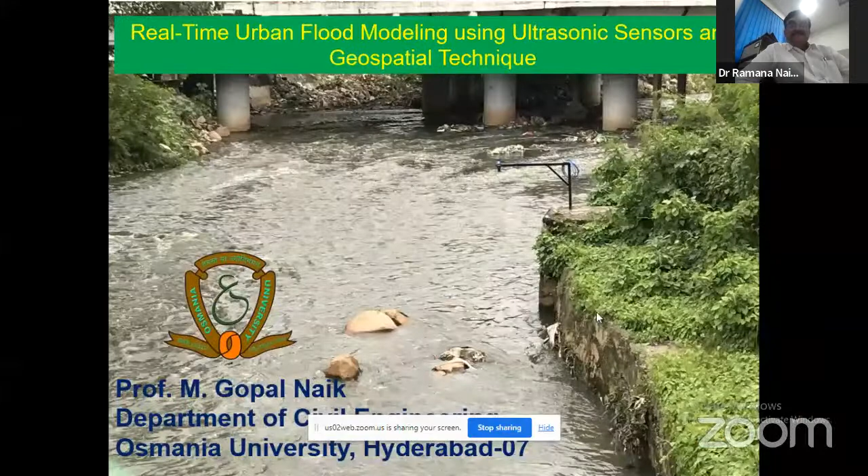Now, is it okay, sir? Yes. Oh no, again it has gone up, sir. You have to share. Okay. Yeah, now it has come. Yes, now it is visible. Now you can proceed. Yeah, it is visible, sir.

Thank you very much for giving the opportunity to deliver a talk on real-time urban flood modeling using geospatial techniques and ultrasonic sensors. It is a pleasure to be part of the Institute of Engineers as an FIE, and it is my pleasure as a Professor of Civil Engineering at Osmania University. I am working on this topic, and I can give a few minutes talk on this, which my PhD students and research scholars are also working on.

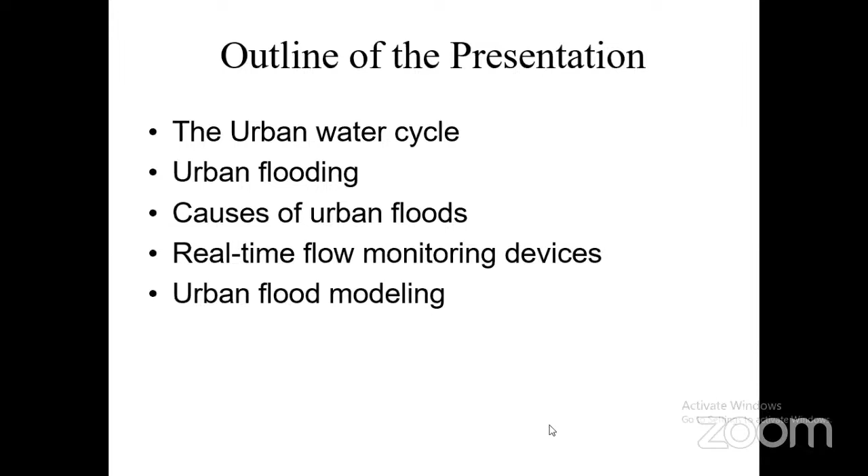Today I am delivering this talk covering a brief outline of the presentation: urban water cycle, urban flooding, causes of urban floods, and real-time flow monitoring devices and urban flooding modeling.

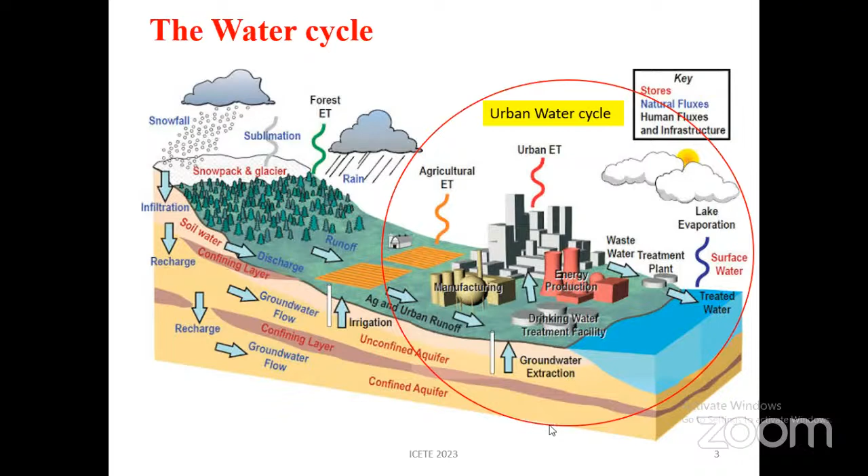Everybody knows the concept of urban flooding, watershed management, urban drainage systems, and hydrologic cycles - how the circulation of water works, what precipitation and runoff are, rainfall-runoff activities, infiltration and percolation, and surface flow. We can see the urban water cycle as how it evaporates, transpires, and then precipitates again.

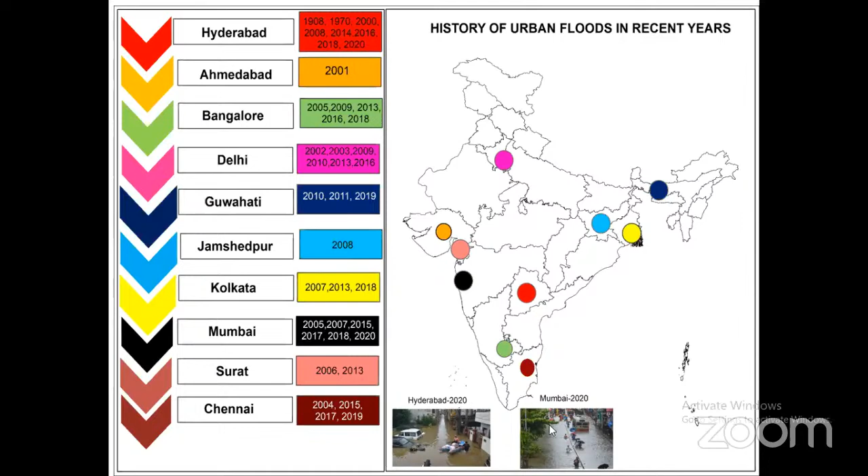Sometimes we are seeing frequent rainfall events - extreme rainfall events which occur at more than 10 centimeters per 24 hours or per day.

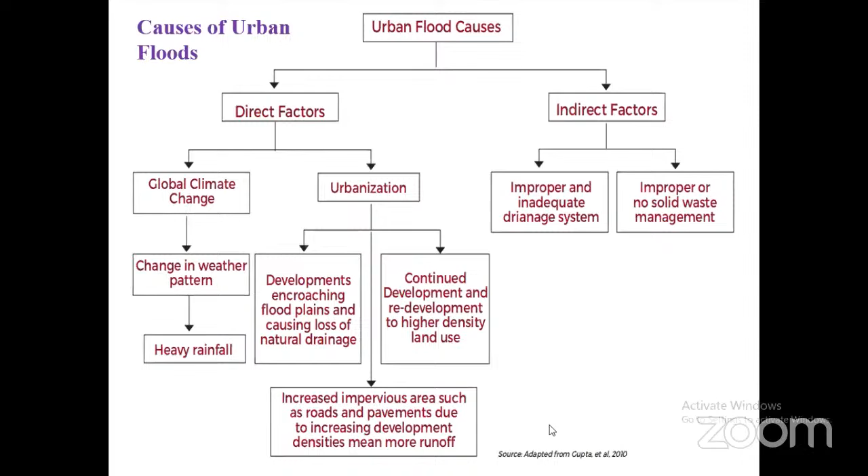The direct factors - climate change - we have seen over the last couple of decades that climate change and global warming are affecting and changing weather patterns, increasing temperature by 1 to 2 degrees on average, which affects the whole system and also contributes to the greenhouse effect.

Global warming and climate change represent a global gradual increase of earth surface temperature and long-term change of global weather patterns. These directly or indirectly affect atmospheric and climatic parameters.

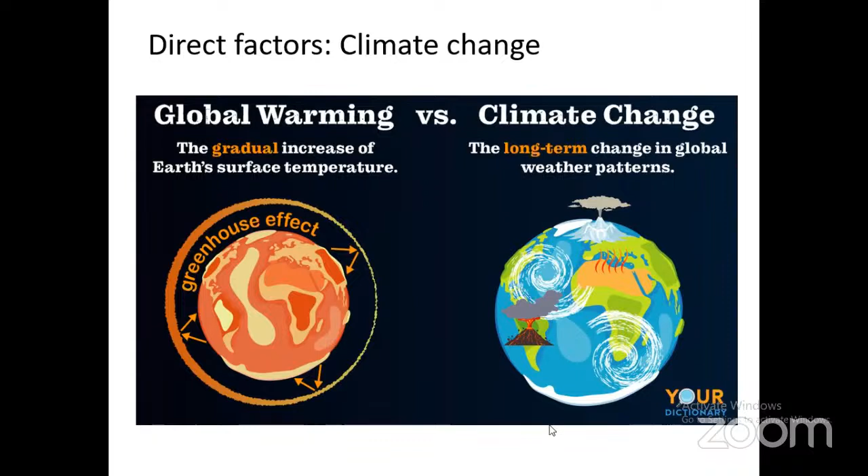These atmospheric and climatic parameters are affected, suddenly changing their behavioral characteristics and causing frequent rainfall events. The change in weather patterns leads to heavy rainfall and sudden formation of cyclones or hurricanes.

This leads to the formation of hurricanes, increases in temperature, and forest fire burns. Pollution from transport - the increase of heavy transport on roads - decreases carrying capacities day by day.

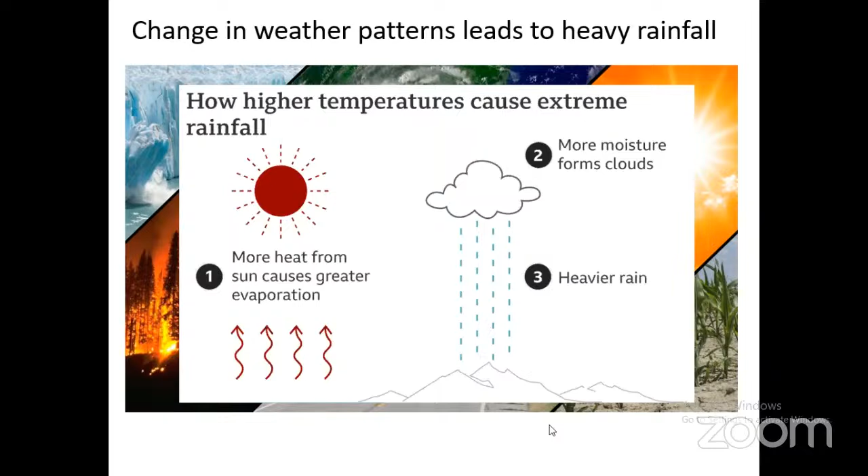These are the major causes for increasing rainfall patterns, with heavy rainfall in different areas. Higher temperature causes extreme rainfall - more heat from the sun causes greater evaporation, heavier rains, and more moisture in clouds. These lead to sudden rainfall in shorter durations with high intensity, occurring frequently.

In the last few decades, after the 90s compared to before, there has been drastic change in urban cities - most first-capacity and second-level cities are increasing drastically. Urbanization growth and population growth are reducing the carrying and holding capacity for rainfall events and rainfall quantity, which directly or indirectly leads to urban floods.

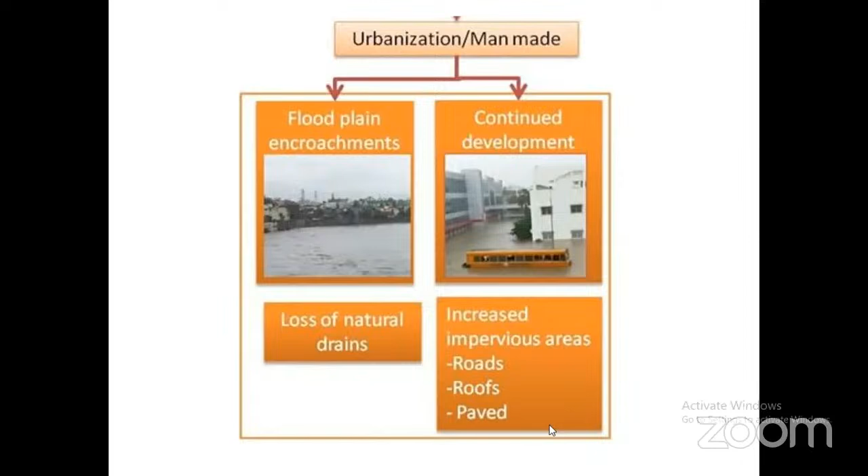Urbanization or man-made urbanization increases floodplain encroachment, leading to continued development in flood-prone zones. It causes the loss of natural drains and increases impervious areas through roads, roofs, and paved surfaces.

In the last few decades, developing regions in Africa, Asia excluding Japan, Latin America, the Caribbean, Melanesia, and Micronesia are the few countries drastically changing in terms of urbanization.

There is a drastic decrease of rural population as all the rural population migrates to urban areas, increasing urban population. These migrations create shelters near river banks and tank encroachments, in open areas wherever the infiltration capacity drastically reduces the rain infiltration and percolation capacity of the surface.

The major holding capacity of water is in the subsurface. When the subsurface is covered with impervious material, there is a drastic decrease in water holding capacity in the surface and subsurface, and most of the carrying capacity is converted into runoff.

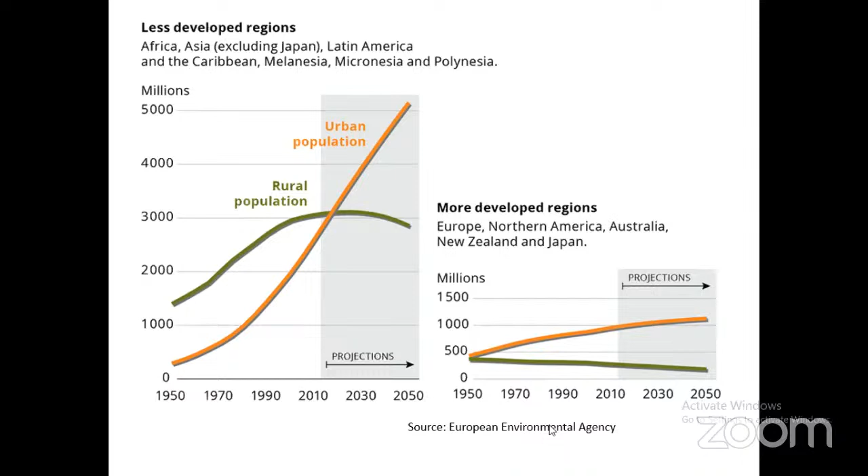Urban heat islands increase the rainfall rate around cities by 48 to 116% as per NASA's report. The wind interacts with urban-induced convection to produce downwind rainfalls, leading to sudden rainfall events and heavier sudden rainfalls with high intensity and shorter duration.

Causes of heat islands include construction materials like concrete and asphalt, lack of vegetation, lack of evapotranspiration activities affecting cooling, waste energy from air conditioners and cooling systems, air and water pollution, and tall buildings blocking surface heat from radiating into the relatively cool night skies.

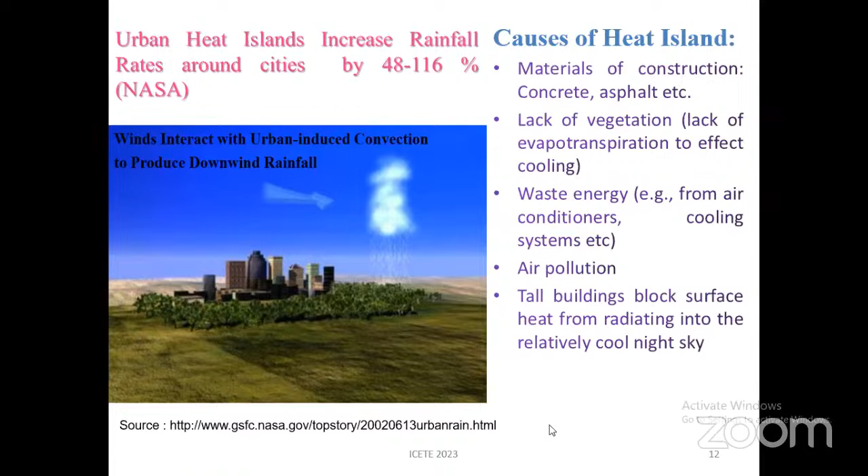These factors influence the surface and create more impact on the atmosphere and climate. This sudden, shorter duration, high intensity rainfall occurs over shorter distances and zones, creating flash floods.

The indirect factor is the poor drainage system, experienced by every city. There is no proper maintenance of the urban drainage system, the stormwater drainage system, or the sewerage water drainage system.

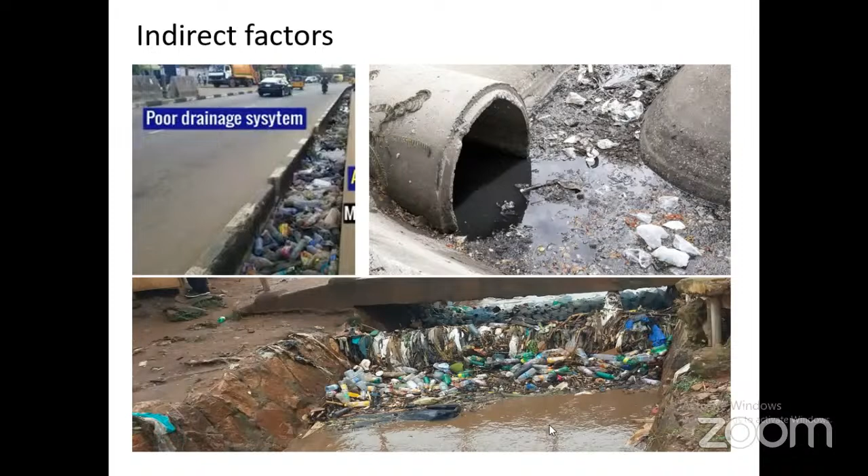Most cities maintain both systems combined, releasing stormwater and sewerage water together. Waste material dumped in the sewerage occupies the stormwater drains, drastically reducing the carrying capacity of the stormwater drain systems.

Real-time flow monitoring devices are electronic devices using weather and water level sensors, remote monitoring systems, and real-time alert sensors. In Hyderabad, I have installed two ultrasonic sensors for flow monitoring, a real-time flow monitoring system, to assess flood risk or flood water levels.

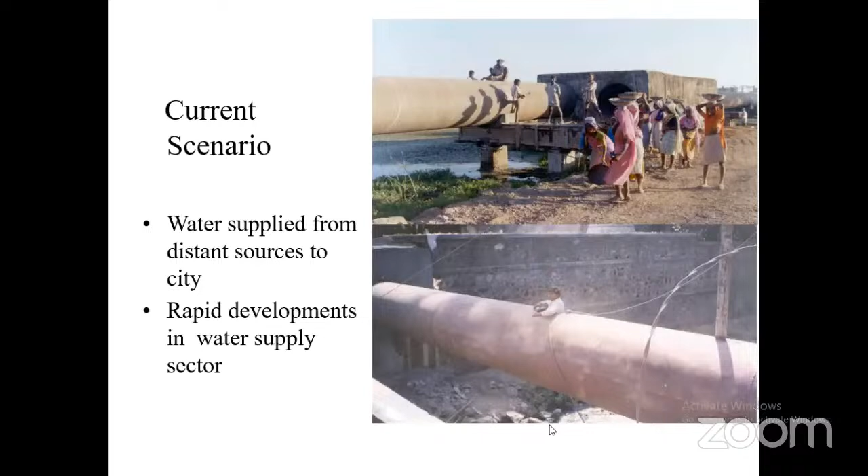In the current scenario, water supplies come from distant sources to cities with rapid development in water supply sectors, but development of corresponding sewer systems is very slow, and development along natural drains is very poor, with no maintenance of the drains and occupants.

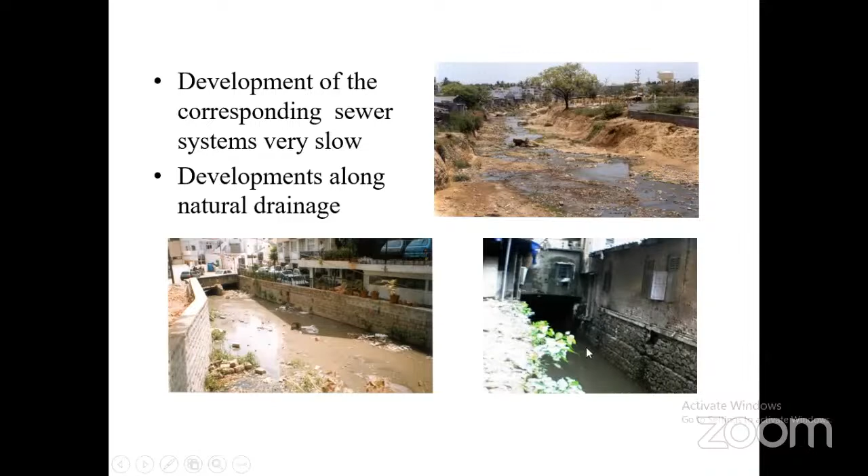In the last picture you can see the drain, and above the drain there is construction of houses - a slab built over the drain with a house constructed on it, and people living across the drain. This situation is happening in each and every city.

So the problem and its challenges we are now facing: downstream flooding caused by excessive upstream flow. The major problem is there is no proper drainage system, no proper maintenance of the drainage system, and no proper creation of drainage system from upstream to downstream.

The conventional solution is larger relief sewer, and modify and upgrade the existing drainage system through desilting. It should be modified by calculating the risk impact study of the upstream area, identifying the quantity of discharge with various rainfall intensities, and creating drains with carrying capacity for the last 100 years and next 50-60 years. This carrying capacity should flow into the proper drainage system. Otherwise, create radial drainage systems with maximum water carrying capacity from upstream to downstream.

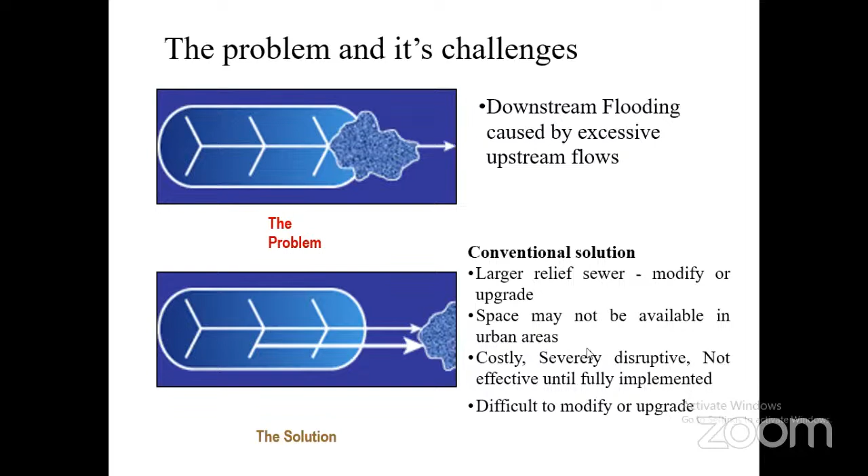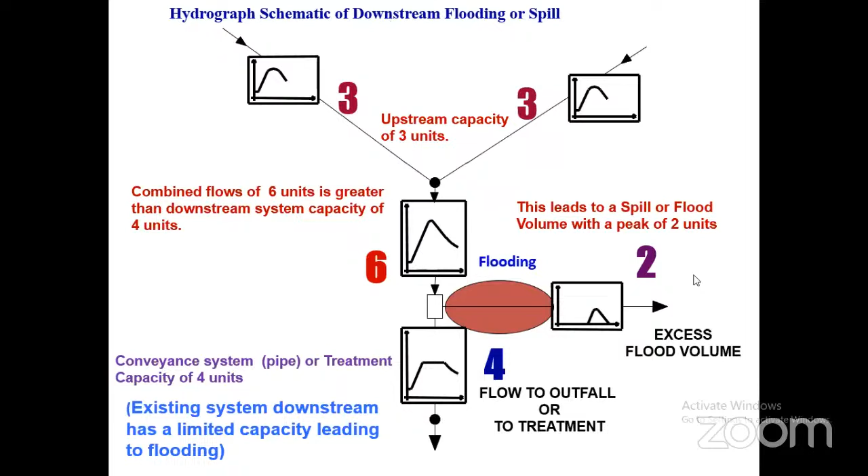So how to remove this flood or drain it up? The solution is that each catchment, the whole area, should be divided into sub-catchments or sub-segments, grid-wise or segment-wise. Calculate the carrying capacity and total runoff capacity of the sub-areas, identify the total quantity, integrate with the next downstream carrying capacity, and identify the excess carrying capacity - how to reduce, evaluate, and adjust that excess 2 unit capacity. This solution should be implemented by the organizing or existing agencies.

So the hydrograph shows the schematic effect of flow control and attenuation - storage capacity of 3 units from upstream and attenuation capacity of 3 units from downstream, joining with 2 units capacity. Then divide the 2 units into different capacities, allowing infiltration into the surface by creating rain gardens, surface drains, or surface gardens where available, or tanks with holding capacity. Hold the excess 2 units and release only the available 1 unit plus 1 unit, totaling 2 units released, which is capable to be carried by the downstream system of 4 units. This concept is required for every city - matching holding capacity, drain capacity, and excess runoff capacity between upstream and downstream, calculated thoroughly.

So the requirement of a flood early warning system: rainfall is highly variable in area and time. A network of rain gauges is required which can measure and transmit rainfall in real time to management authorities, because rainfall varies time to time and space to space. Earlier, the calculation required a rain gauge station installed every 2 or 3 kilometers. But now in Hyderabad, even at 5 kilometers there is no proper rain gauge system to measure rainfall quantity in a particular zone.

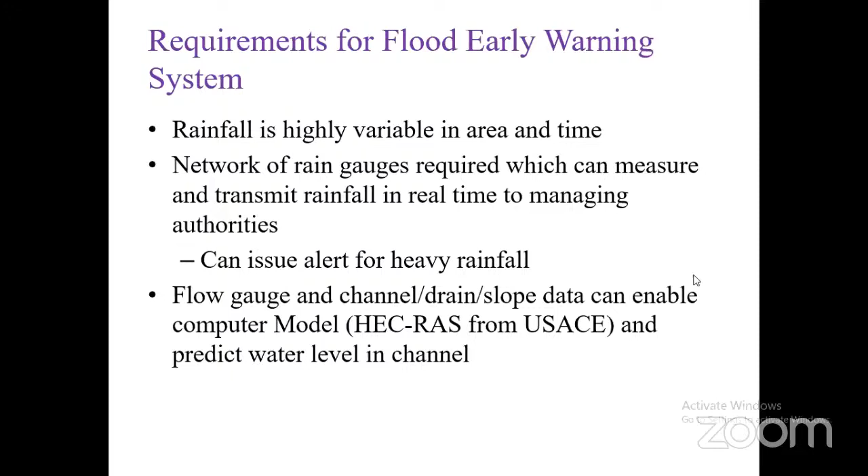The flow gauge and channel drain slope data enable computer models. This data should be analyzed and simulated using software or database management systems available in the system. Here I used the HEC-RAS model, which can calculate the total runoff capacity from upstream to downstream. For flood and water level forecasting, the required input parameters are catchment area, catchment data, precipitation data, and discharge data.

What is the catchment? What is the rainfall that occurs on that particular catchment? And what is the quantity of discharge coming from that particular catchment? Then we can simulate by using simulation models; there are many simulation models: HEC-HMS, HEC-RAS, PCSWMM, the SWAT model. So many models are available. So you can simulate that, identify the quantities, and then create the hydrograph, the simulated hydrograph, and observe here.

Then you add the additional parameters: river geometry, size, shape, depth, width, height. What is the channel geometry, river geometry, bridges, and culverts? These are inputs that are required by HEC-RAS and PCSWMM. So there we can do the hydraulic simulation.

So first we need the hydrological simulation, where we consider the hydrological data: surface catchment area, catchment slope, catchment discharge, catchment runoff. Then we can calculate by the hydraulic simulation the discharge, depth of flow, velocity of flow. These are the hydraulic parameters which can be calculated by using the standard software available: PCSWMM, a personal computer-based stormwater management model, and HEC-RAS, the Hydrologic Engineering Center models.

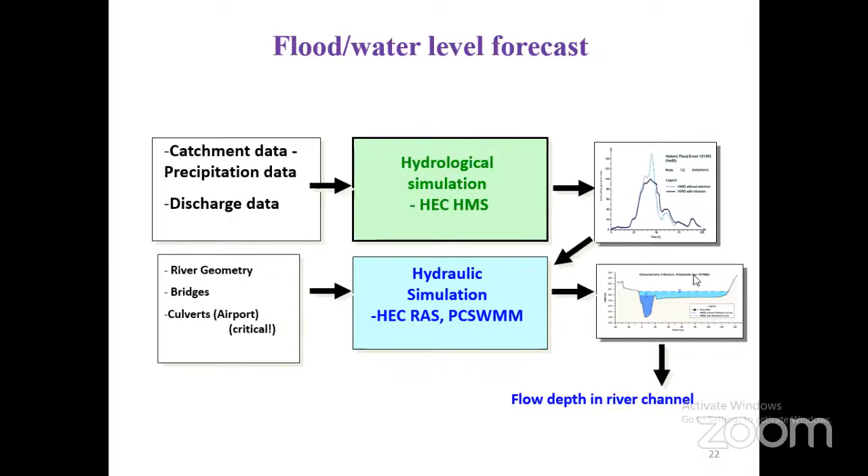And we finally calculate what is the depth of flow carried by the river, carried by the channel, carried by the nalas, and then what is the flooded excess water, what is the capacity of the nala, what is the excess capacity of the nala. We can calculate that.

These are my first sensors, installed at the Khairatabad flyover near the 20 MLD sewerage plant in Khairatabad, near the PV Narasimha Rao statue and the Ambedkar statue, with flow gauge installations at the Begumpet and Balkapur Nalas. So we installed them in these two nalas and are measuring the water level every minute, every second. Per day we are getting 1440 readings of the water level at minute level.

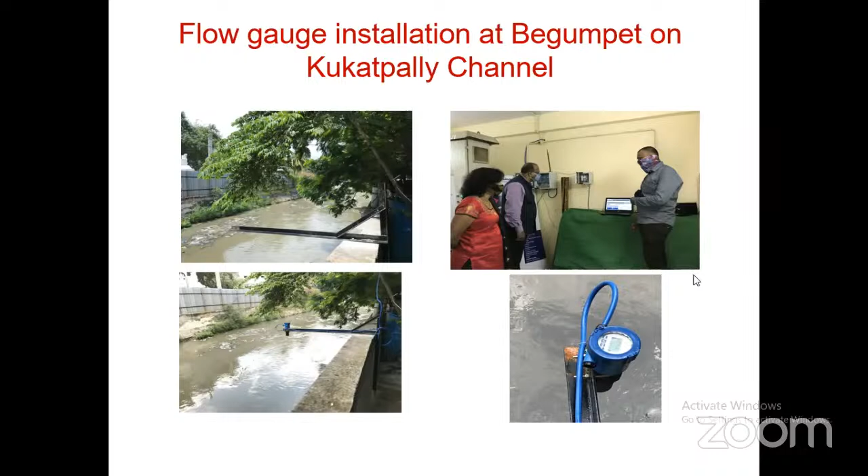How is it increasing? Here it is the end point, the outlet point, and what is the upstream nala; from starting point to ending point, how much capacity of the nala is carrying the water flow, that is what we are measuring. So in this presentation, I am concentrating on the data presented here.

Two nalas: one, the Balkapur Nala, is near the Khairatabad flyover. The other is the Kukatpally Nala, where other sensors are installed near Katta Maisamma, near the Begumpet flyover. Luckily we installed those two sensors just before the 2020 floods, and from June 2020 till date we are capturing the data every second, every minute. What is the water level coming from these two nalas?

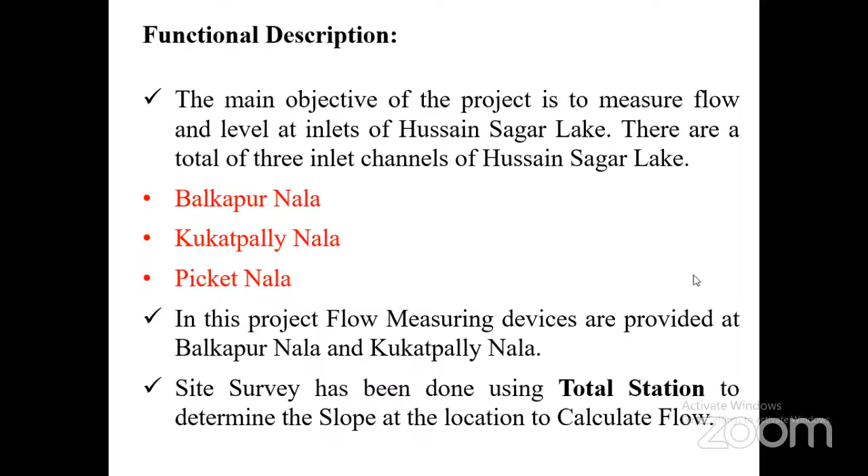We also identified Picket Nala, but the sensors are installed in only two nalas, and this project's measuring devices provided this data. These nalas were identified based on the total station survey we did. We identified the base station, the base elevation by total station from mean sea level, and then the particular slope of the location, and we are calculating the flow at these two locations, measuring by using these ultrasonic open channel sensors.

The components are ultrasonic open channel flow meter sensors. They work with GPRS data loggers, radio sensor data loggers. The data is captured by the sensor, goes from the sensor to the data logger, from the data logger to the SIM card we installed there, and from the SIM card the data is stored in the cloud servers we installed. Accessories are required: UPS, surge protection, power supply module, cables, everything.

So the ultrasonic open channel flow meter is used to measure the real-time flow level in the channel. Every minute, every second, the present data is received on a mobile, so that we can assess, we can model, we can alert them. If the data is received every minute, and we know the carrying capacity and the flow coming from upstream, then we can automatically send alerts to the downstream areas: a flood is coming, so evacuate immediately.

This system is very useful for the agencies who are managing the flow: the Hyderabad Metro Water Works, GHMC, the Revenue Department, the Lakes Department, the Musi River Board. These departments should have this type of mechanism and calculate the data at every location, every 1 kilometer.

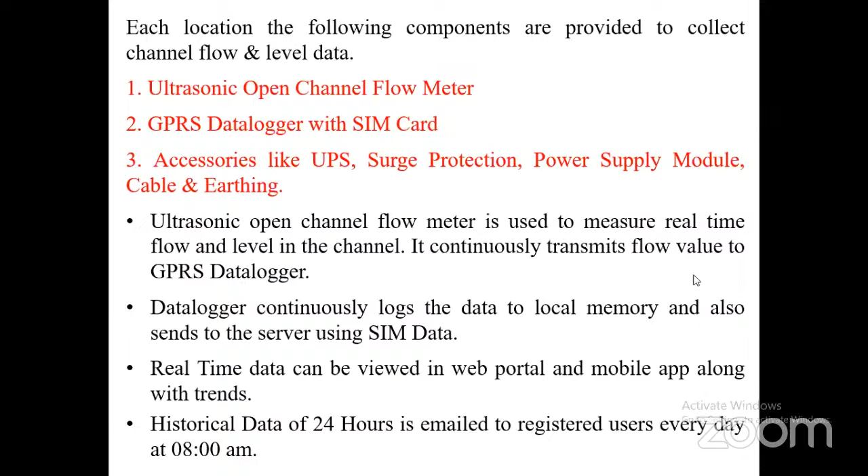Historical data of 24 hours is emailed to registered users every day, which we can calculate from 8 a.m. to 8 a.m. This is how the system works, how the ultrasonic sensor works. The sensor is installed at the nalas, just above the nala, at 10 feet or 5 feet depending on the availability of the nala. We install 2 sensors, and the 2 sensors are connected to the data logger near the power room.

So we connected the same sensor cable to the GPRS data logger. From the data logger, through a wireless system, through the SIM card, we are connected to the server. The server records every minute, and from the server it sends alerts to the mobile. Those who are registered mobiles in the data server will get regular information minute to minute.

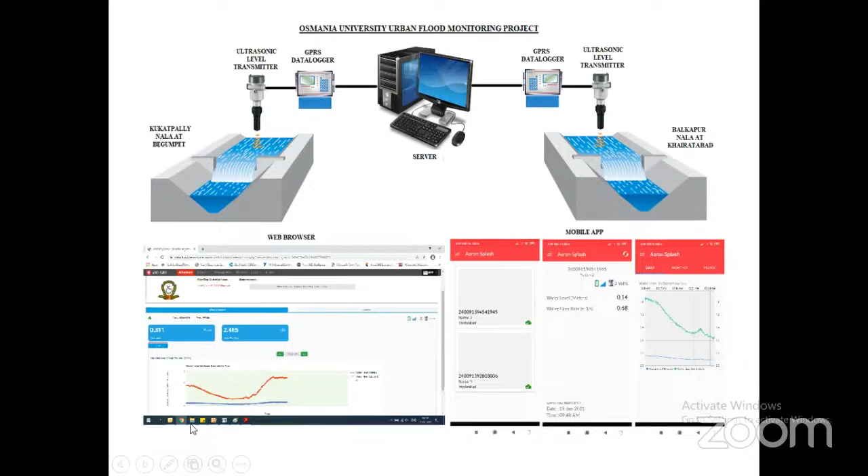Generally this measurement is taken by using the Manning equation. The flow rate, Q discharge, is calculated by the area into the hydraulic radius of the channel and surface slope, divided by n. So we calculate using the Manning formula with the surface slope, cross-sectional area, wetted perimeter, length of uniform flow, and we can calculate that.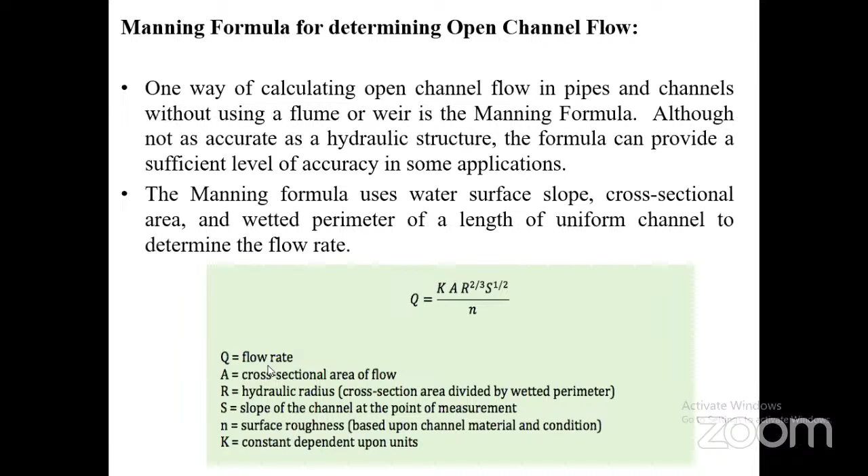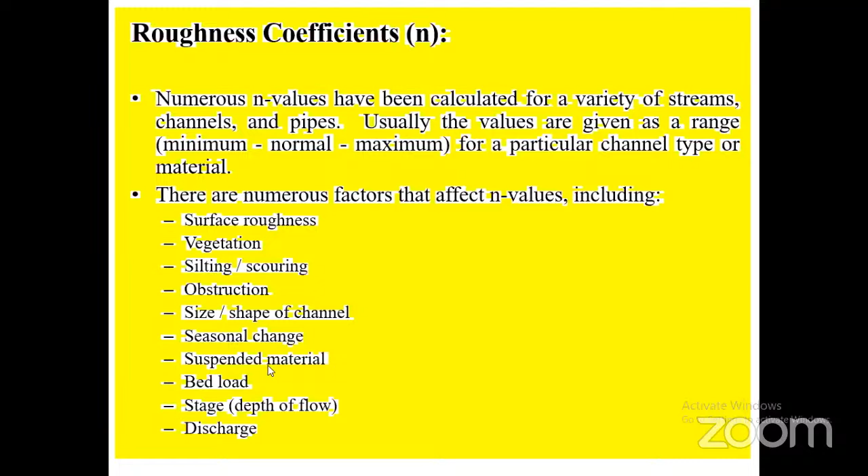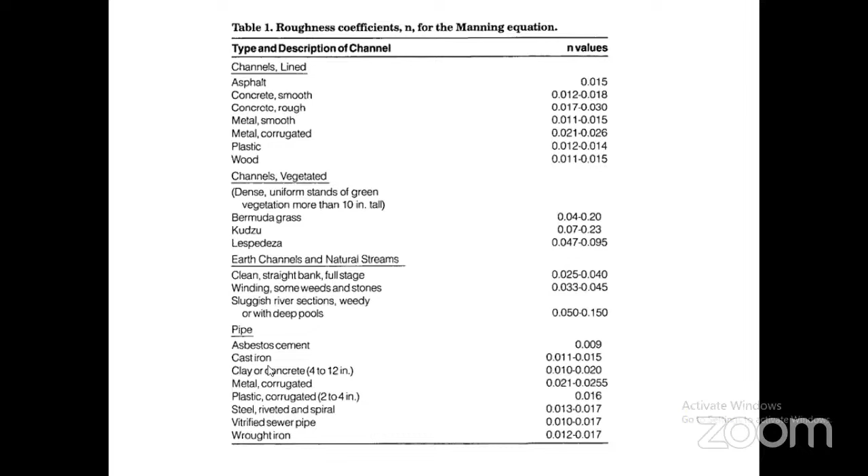The roughness coefficient we can generally take based on the standard values from the literature, such as Ven Te Chow and others, depending on whether the channel is a paved channel, vegetative channel, rough channel, or slope channel. Based on that, we can consider different Manning's n values based on the practical situation, field visit and field data.

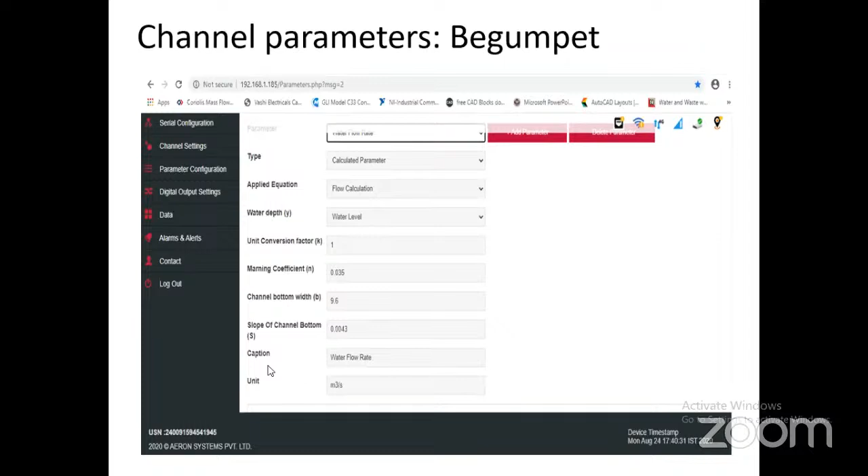So, channel parameters in Begumpet. In Begumpet we are calculating parameters like flow, water level, discharge, and the Manning coefficient which is given, channel data and channel slope are given, and we calculate the flow depth and discharge every minute in both the Khairatabad Nala and the Kukatpalli Nala. These are the 2 values we are receiving from the data loggers: water flow of 2.342 cubic meters per second.

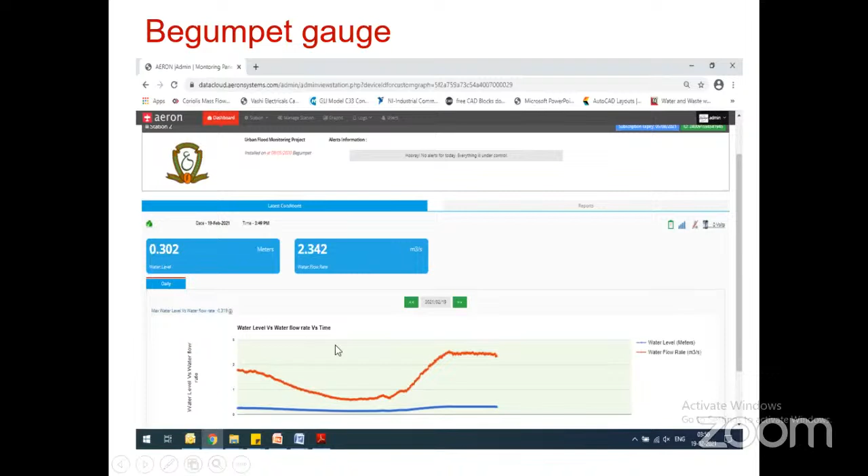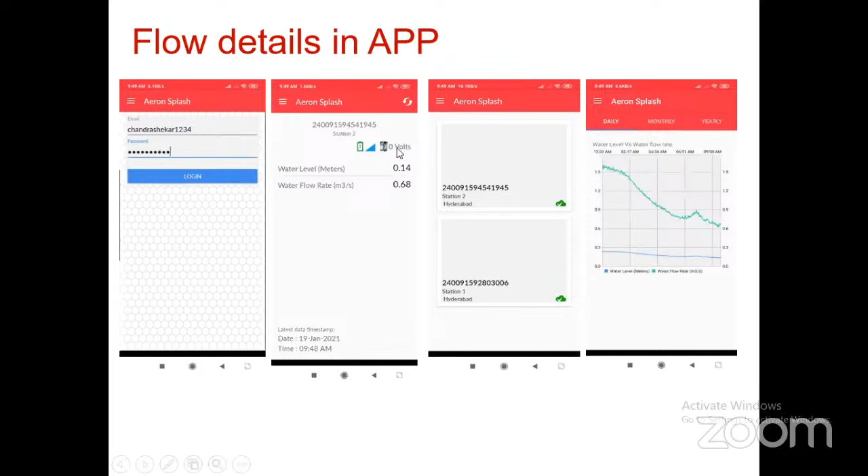That particular graph was calculated from the 19th February 2021 data, and the time of day can also be measured. Here you see the graph of flow data details. We can measure the water level here, and second, we give the water flow rate: 0.68 cubic meters per second, and the water level is 0.14 meters. This data was generated on 19th January 2021, 9:48 a.m. Like that, every minute we are generating this data.

This data is the input to the model. The model is driven by rainfall. Then we can simulate using hydraulic model development. We record the rainfall event and catchment characteristics using the HEC-HMS hydrological model, and calculate the catchment runoff and runoff curves. Then we develop the river geometry, add it as input, use the HEC-RAS model and calculate the hydraulic parameters, that is water level and discharge.

Then we can also compare with soft computing techniques like artificial neural networks. We can compare the data generated through the theoretical or physical models with the observed data, as well as with advanced techniques like the artificial neural network, the ANN model.

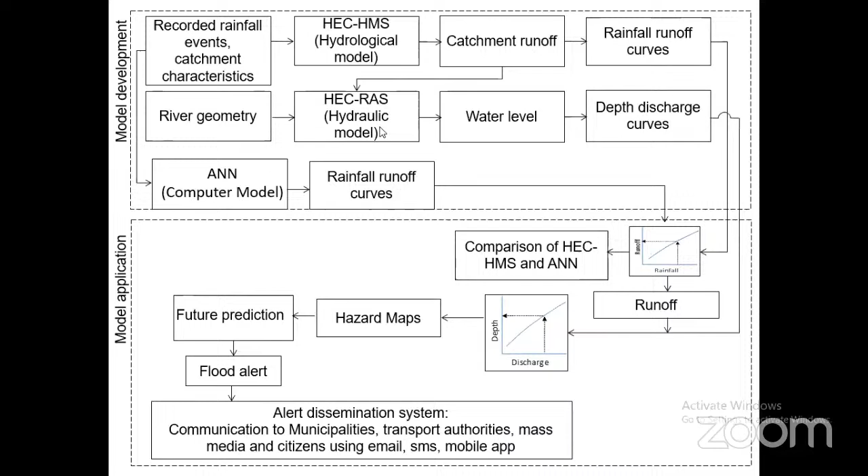After comparing, we see how much variation there is, and what the future prediction is for the next 100 years, 50 years, 30 years: the frequency of such events occurring, and the flow rate generated from time to time, which will give alerts in the future. This is software that any researcher can use, and they can generate any type of data using it.

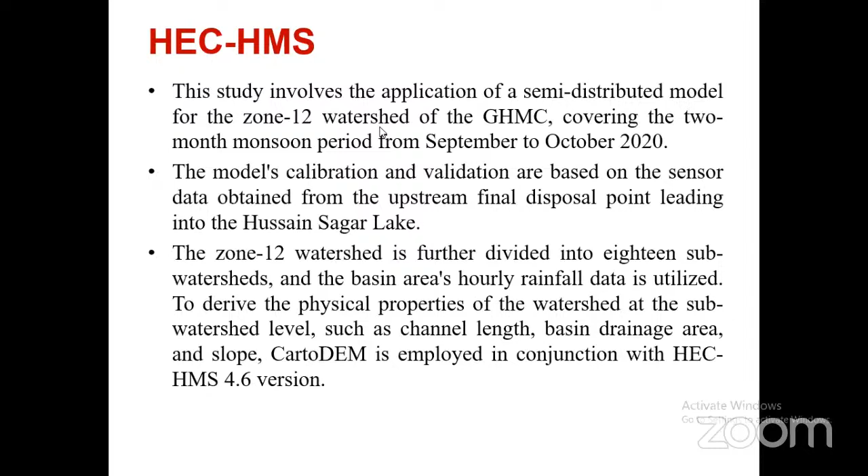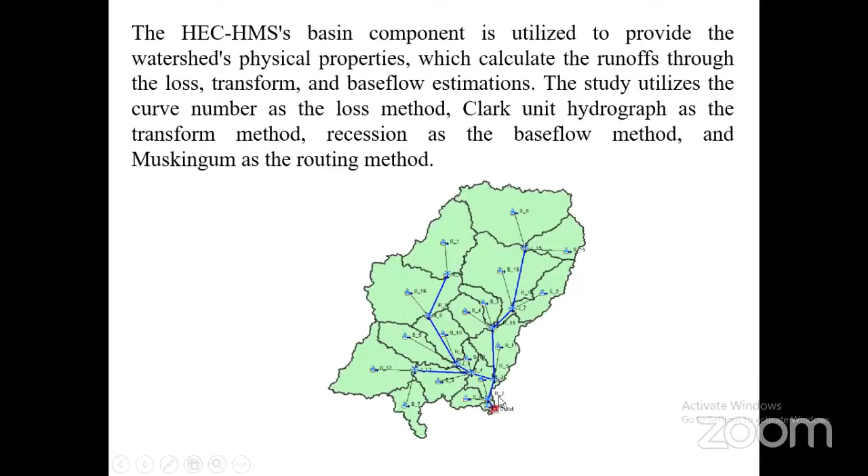We can calculate each node, then join the nodes in the series components, carrying forward from upstream to downstream and routing from one nodal point to another nodal point by using HMS. So these are some of the values we can calculate using those data.

Another method we can use for comparing the data is ANN, artificial neural network. A feed forward back propagation artificial neural network model has been used to simulate the discharge and compare with the output model.

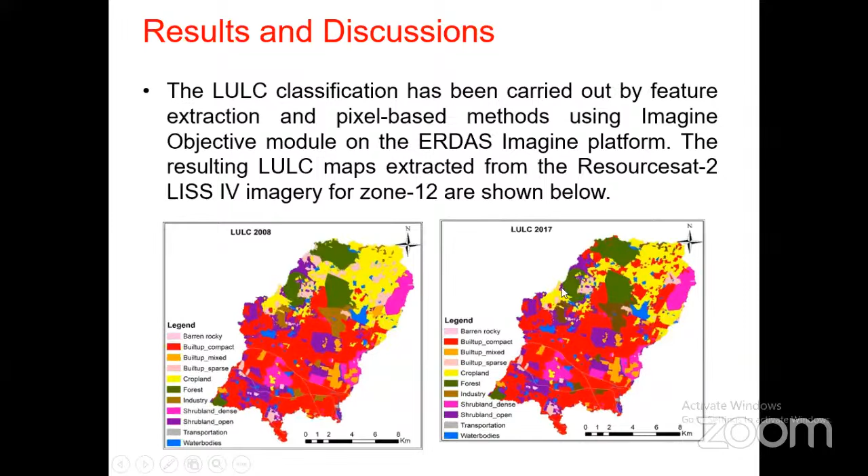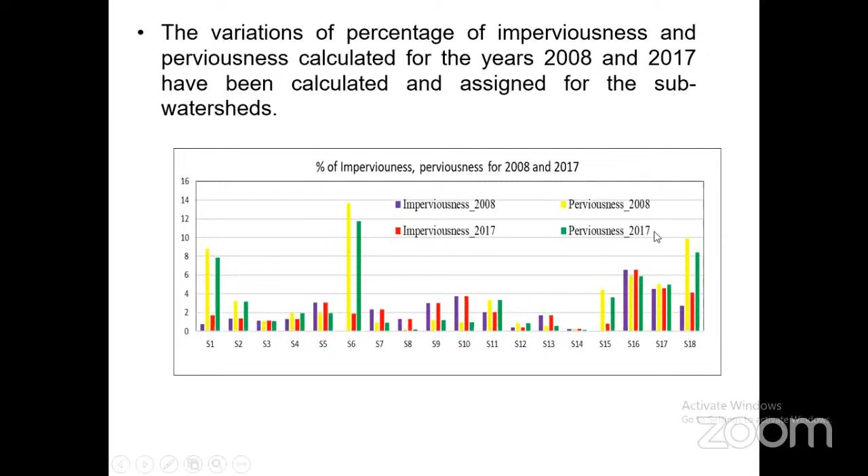In the last 10 years it increased drastically. All the area is converted into built up area. So see the various percentages of imperviousness calculated in 2008 and 2017. Compare: blue is impervious and red is impervious 2017, and impervious and pervious in 2008. The blue, yellow and green lines are always greater. So year to year the impervious area is increasing in most of the watershed catchment areas.

So this is the model output. The study used hourly rainfall and observed flow data from the period of September to October 2020, that is, our October floods. Especially, we simulated the October 2020 flood, a major loss for Hyderabad.

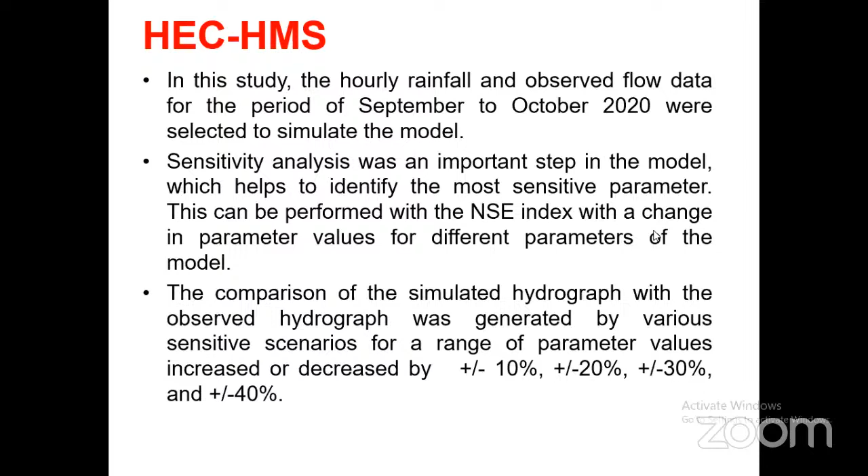We simulated the two events, the October events on 13, 14, 15 October 2020, and also carried out the sensitivity analysis, which helps to identify the most sensitive parameters, and computed the Nash-Sutcliffe efficiency index while changing the parameter values. We compared the simulated hydrograph with the observed hydrograph, with parameter values increased or decreased by plus or minus 10 to 30, or a maximum of 40%.

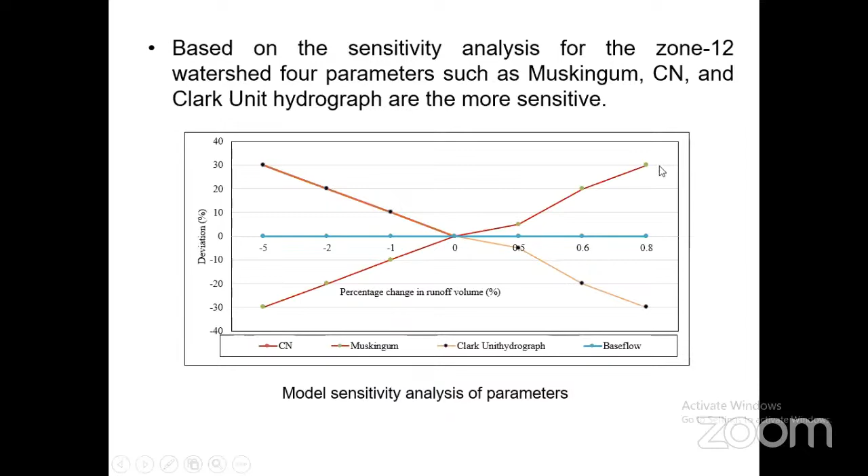You see the percentage of change of runoff based on the sensitivity analysis of the Zone 12 watershed parameters, and how the values change. Some parameters are drastically decreasing and some are drastically increasing. Curve number and Muskingum parameters are increasing drastically. So this is another technique: comparison of the observed and the simulated flow hydrograph with sensor gauged observed data.

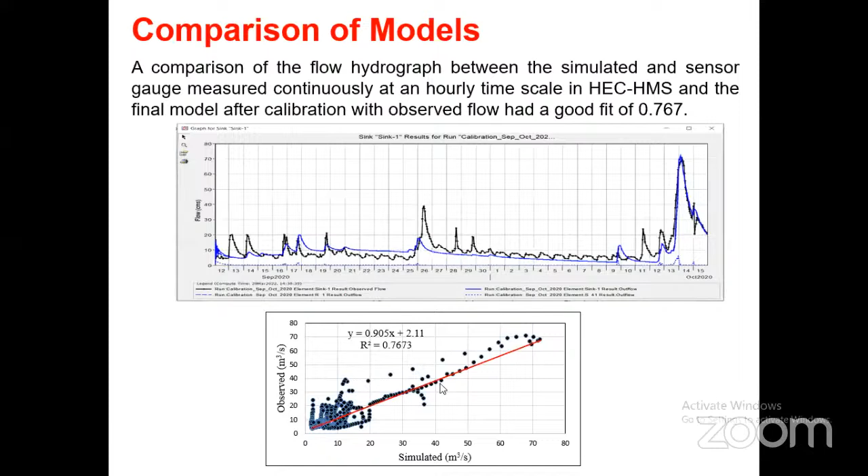Here the blue line is the calibrated data and black is the observed data. The simulated calibrated data from the HMS model almost matches the observed data. In the scatter graph, the simulated versus observed relationship is 0.76, so 76% correlation between observed and simulated data.

The same values were simulated using ANN also, and in validation both ANN and observed data match more than 80%, near to the reality of the observed data. Other parameters evaluated with ANN also almost match the observed values. In conclusion, the sensitivity analysis indicated that the input parameters curve number, time of concentration, and K parameter are more to less sensitive in that order.

Among all trials performed, the ANN feed forward back propagation architecture is the representative model. It was also applied to this study area and tested: 70% of data used for training, 15% for testing and 15% for validation. All the data shows almost 80%, reasonably well.

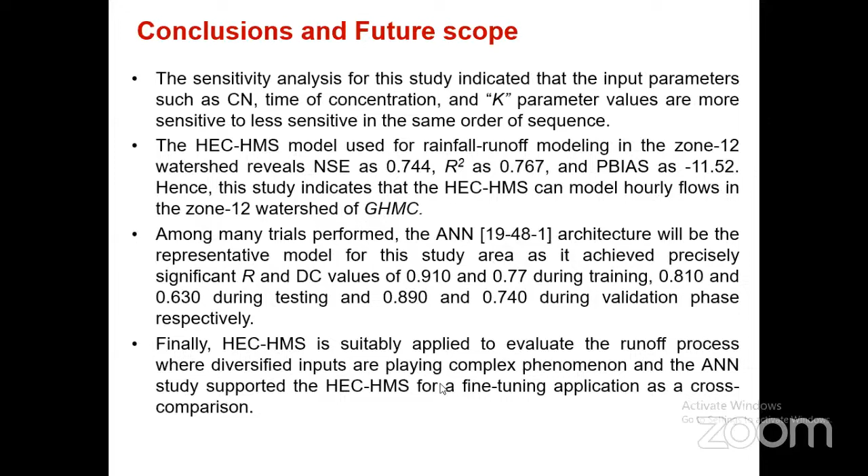So finally, this study is suitably applied for evaluating the runoff process where diversified inputs play complex phenomena. ANN also supported HEC-HMS for fine-tuning applications as a cross-comparison. So in future, we need more.

The current study suggests that in future we can extend the study to evaluate the model performance with longer rainfall records, frequent flood-prone zones should be identified, and reliable sensitivity parameters have to be used to test the performance evaluation.

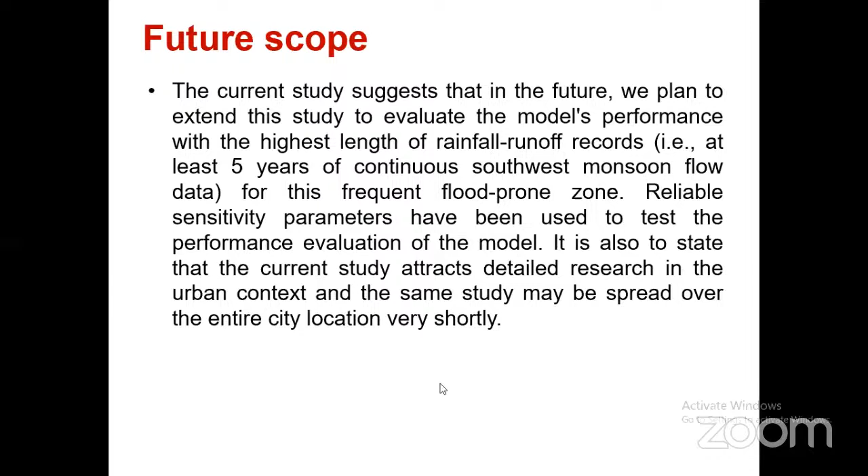It also suggests more rain gauge stations should be installed and the rainfall intensity calculated with shorter duration, high intensity, over smaller areas, even a 1 kilometer or 2 kilometer radius. Then we can calculate these data and present near-accurate, real data.

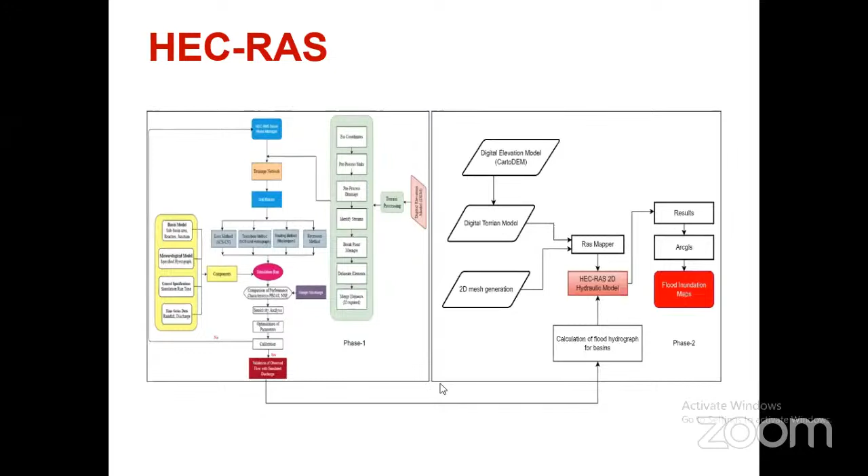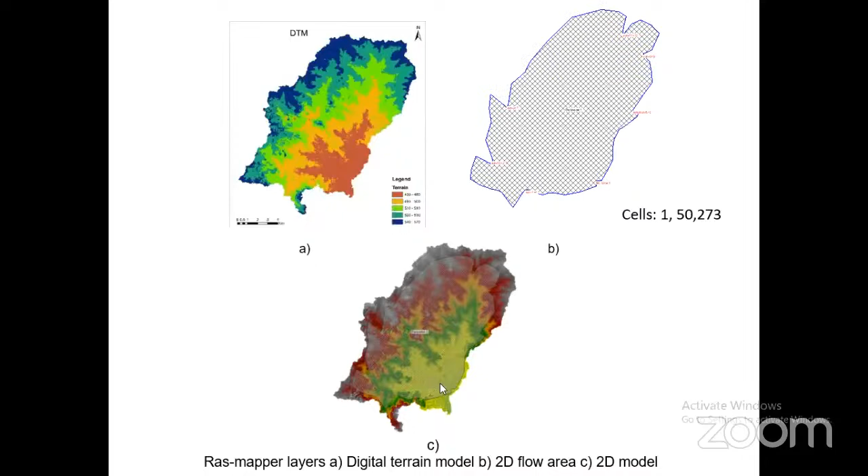The HEC-RAS model has a capacity component of 2D flow computation, 2D model control specification, 2D mesh generation and model simulation. These are the remote sensing maps, layers, digital terrain model, 2D flow area and 2D models for different areas. This is the same Begumpet zone, zone 12, Khairatabad and Kukatpalli Nala.

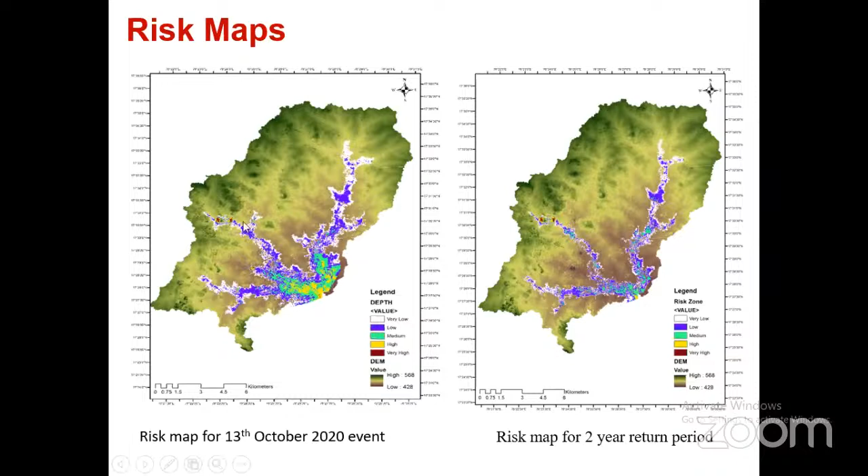Risk maps have been prepared for the October 13, 2020 flood, and for a 2 year return period. See how much area is occupied, how the flood is increasing day by day. Risk maps for 10 years return period, 2 years return period, and similarly 25 years and 50 years return period.

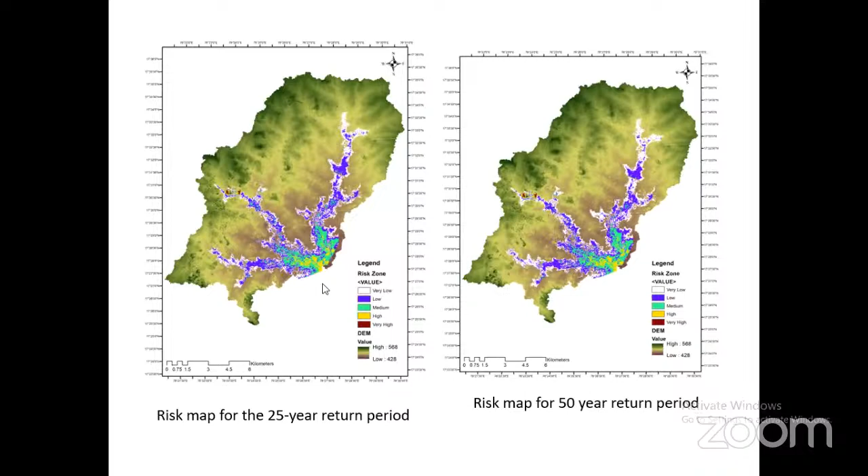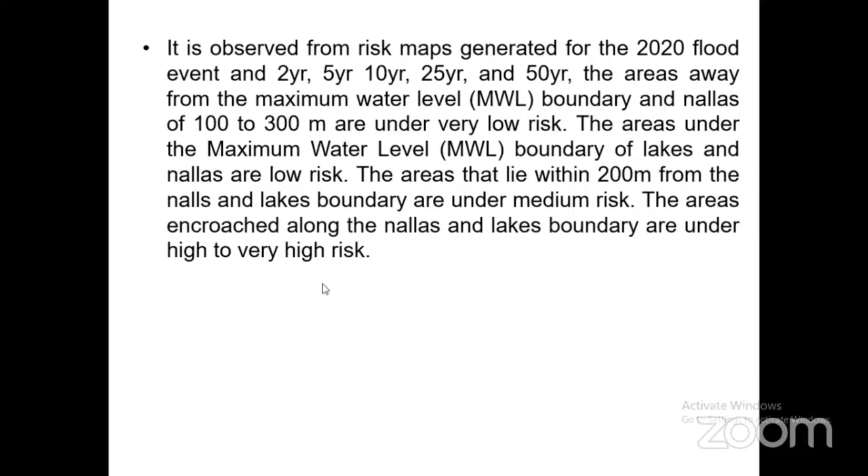See how the area is increasing, and the maximum water level at lake boundaries is increasing, nalas are reducing. The area lying within 200 meters of nala and lake boundaries is under medium risk, and areas encroached along the nalas and lake boundaries are under high to very high risk.

So I'm ending with this. These are a few findings presented in this study. I am stopping this presentation here.